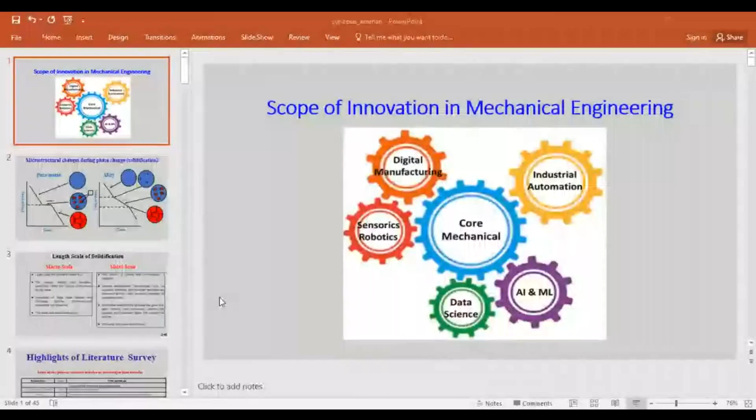If we take the case of Cartesian coordinates, we have kxx, kyy and kzz. For isotropic solids, kxx, kyy and kzz would be equal, but for anisotropic solids, it is not so.

I'll give you an example of gallium. Gallium's solid structure is anisotropic, so it has thermal conductivity of 16 watts per meter Kelvin, 35, and 88 — huge differences there.

We will not go into the physics of why it is so. Keeping the time limit, I'll just tell you the basic reason it happens in some materials: it's because of the planar density. Along the dense planes, the thermal conductivity is comparatively higher, and this is very nicely seen in the case of gallium.

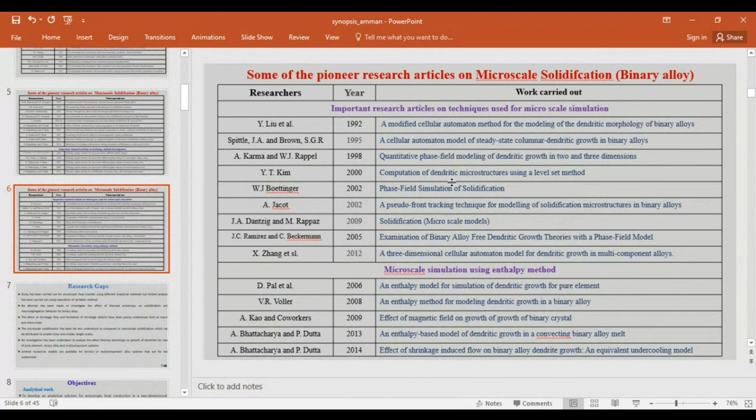Now coming to the case of microscale, some of the important research articles on techniques used in microscale solidification. In the case of microscale, we basically use three methods: the first is cellular automata, the second is phase field, and the other is the enthalpy method.

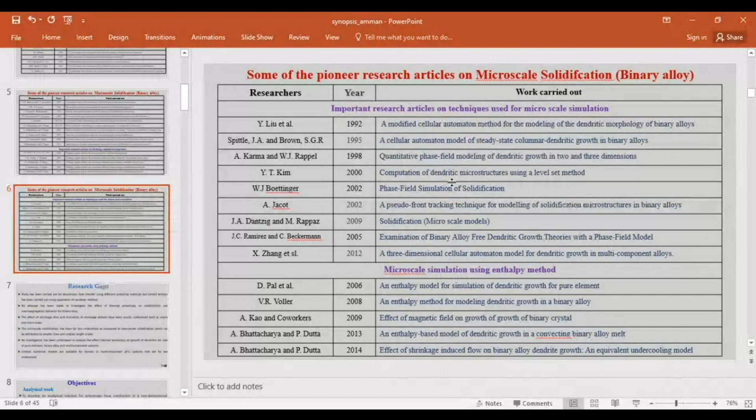In our case, we are using the enthalpy method. Most commonly, phase field and cellular automata are being used. The enthalpy method is a kind of quasi phase-field method, in which we use a single parameter that is calculated in order to compute the phase.

The cellular automata method is more empirical in type — based on all the earlier experiments that have been done, it calculates some of the parameters used in the calculation. Some of the pioneer authors are Kim, Boettinger, Dantzig, and Rappaz. You can refer to the book by Dantzig and Rappaz for the case of microscale solidification models.

Then in India, firstly Dutta sir and his group from IISc Bangalore developed and used the enthalpy method for developing models related to microscale solidification. So based on the above literature survey on anisotropy and microscale solidification that I have discussed...

These are the research gaps that have been identified. Studies have been carried out for anisotropic heat transfer using different analytical methods, but very limited analysis has been carried out using the separation of variables method.

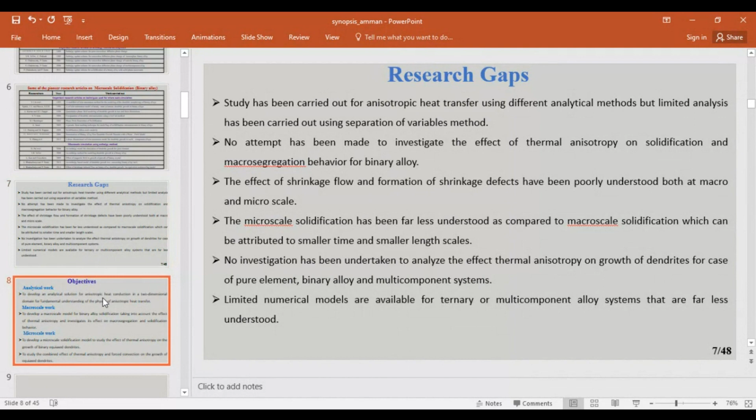This has been categorized into three categories. The first is analytical work. For the case of analytical work, it is to develop an analytical solution for anisotropic heat conduction in a two-dimensional domain, for fundamental understanding of the physics of anisotropic heat transfer. Since a lot of models have been developed, this is basically for validation purposes.

Moving on to macroscale work. The basic motto here is to develop a macroscale model for binary solidification, taking into account the effect of thermal anisotropy and investigating its effect on macrosegregation and solidification behavior. We have analyzed the effect of boundary conditions, thermosolutal convection, and other different parameters that we will discuss later.

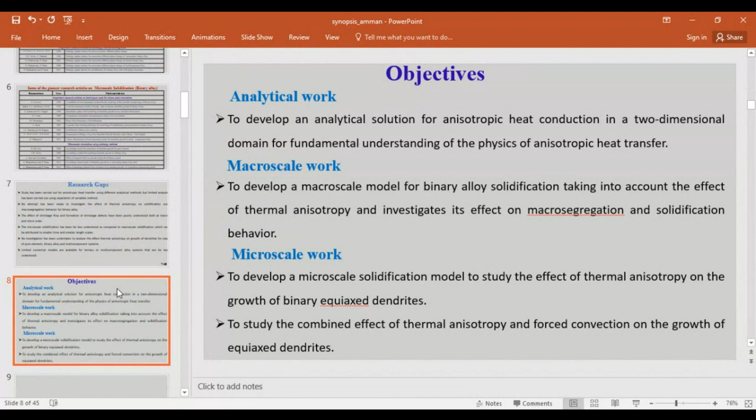Coming to the microscale work, here we have to develop a microscale solidification model to study the effect of thermal anisotropy on the growth of binary equiaxed dendrites. This is a very interesting work, the microscale solidification. This would be followed by a study of the combined effect of thermal anisotropy and forced convection on the growth of equiaxed dendrites.

So coming to the analytical work, here we are using the separation of variables method.

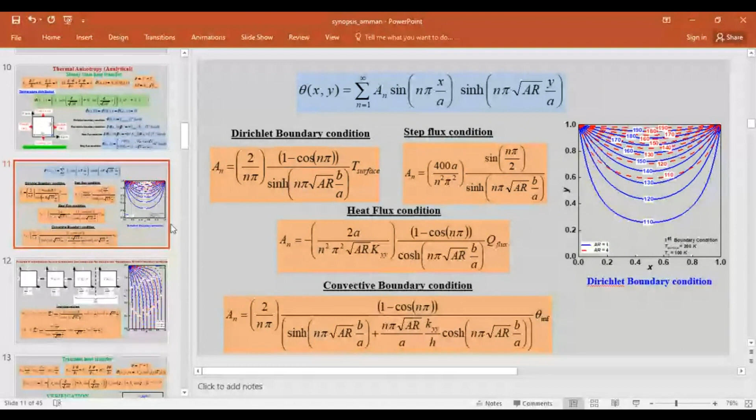When AR is greater than 1, it means - since AR is defined as thermal conductivity along the x direction to that along the y direction - the heat transfer is higher along the x-axis as compared to the y-axis. That's why the temperature gradients that we are seeing along the x-axis, denoted by red lines, are comparatively small. This one is for the steady state heat transfer.

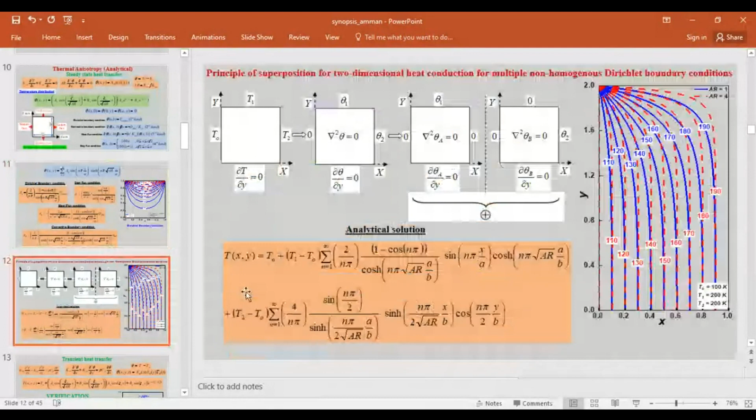Then we are using 2D heat conduction for multiple non-homogeneous Dirichlet boundary conditions. Here you can see this is the initial problem - the left wall is made at a different temperature, top at a different temperature, and bottom at an insulated condition.

Using the principle of superposition, we can divide this problem into individual problems. Here we can put it 0, theta 1, del theta a by del y equal to 0. And here 0, 0, theta 2, del theta b by del y equal to 0. So the analytical solution we get using this is in this form.

If we plot the temperature contours, this is a contour line diagram. Here 190 degrees means this region between 190 and 180 - this temperature is there.

Here what we see is that as there is increase in heat transfer along the x direction, the gradient decreases. You can see here, because if you draw a line, the contour lines are closely spaced here along the x direction. This red one denotes the anisotropy ratio. So moving on, transient heat transfer.

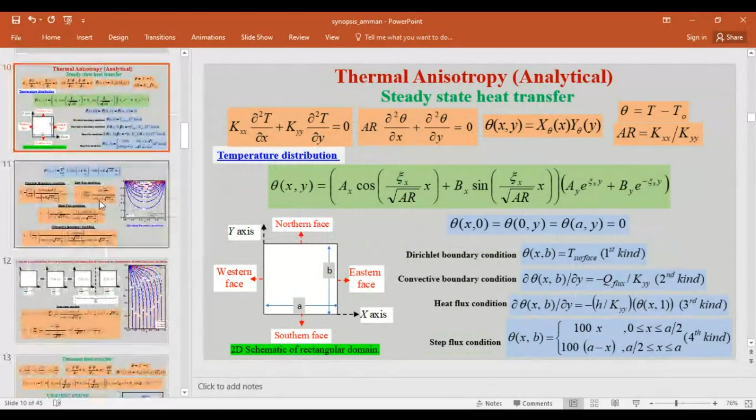So like we had for the steady state condition, since this right hand term is 0. But for the transient term, this would be rho Cp del T by del t. I will not go into the derivation, but we can see the temperature distribution based on this equation - this is the equation that gives the temperature distribution.

So here the problem taken is rho Cp is equal to what? Kxx is 1 and Kyy is 0.1.

Our initial condition - you see, whenever the problem is transient, you need to give an initial condition. Besides boundary condition, initial condition also needs to be given. So based on this initial condition, boundary condition, and thermophysical parameters, the analytical solution we're getting is given by this expression, where ξx is pi into root AR and ξy is pi.

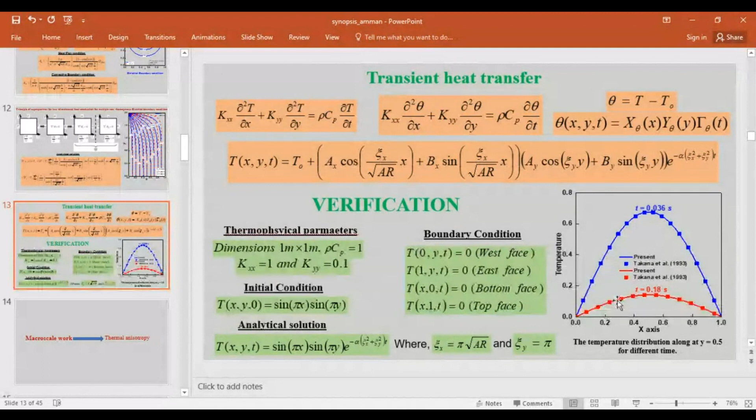This has been validated by the work done by Takana et al, which are in good agreement, for both isotropic case and anisotropic case.

So moving on to the first major work. For my case, I had done work on macroscale and microscale heat transfer. Coming to the macroscale heat transfer, this one is a general diagram that depicts all the different properties and other thermophysical parameters that are affecting the flow governing solidification.

So here the electromagnetic forces are there. Electromagnetic means when you place a magnetic field, it generates a flow.

So it may affect. Then there is dendrite solidification. The formation of dendrites would lead to a formation of porous structure. So the flow of fluid, that is molten metal, in this porous structure is different and depends on the morphology of the porous structure. So that's what you take care of.

Then is solute segregation. Now what happens whenever a material solidifies, like aluminium, copper is in solid aluminium, but when you solidify it, it will reject the copper. So that is solute segregation - the solute is getting segregated. So from the phase diagram you will get this. We will discuss the phase diagram in the next slide.

Then is our morphological instability. Morphological instability means your solid-liquid front is there. So if it is unstable, it may create some problems.

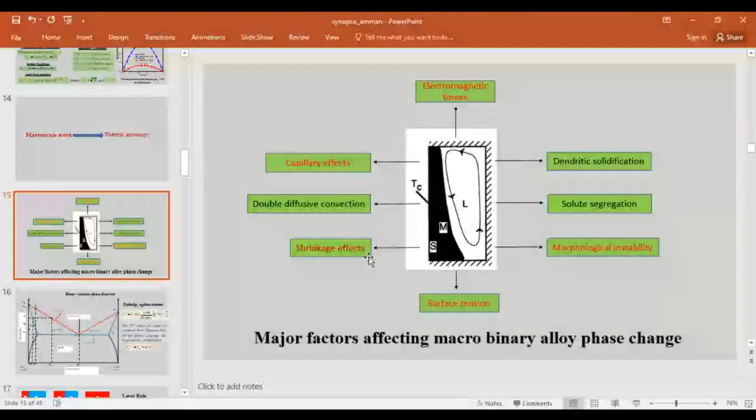I will not talk about this computational part in detail, since most of you won't have gone through this course with CFD, because...

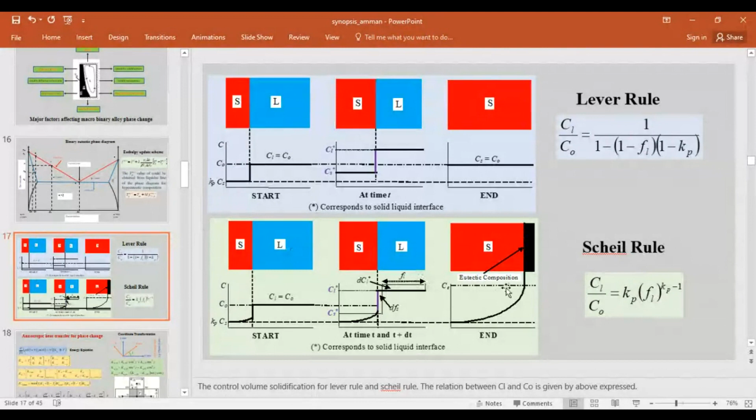And the Scheil rule is there, right? So the Scheil rule, here we assume the diffusion to be zero, right, in the case of the solid, which is actually more true, right? So moving on to next slide.

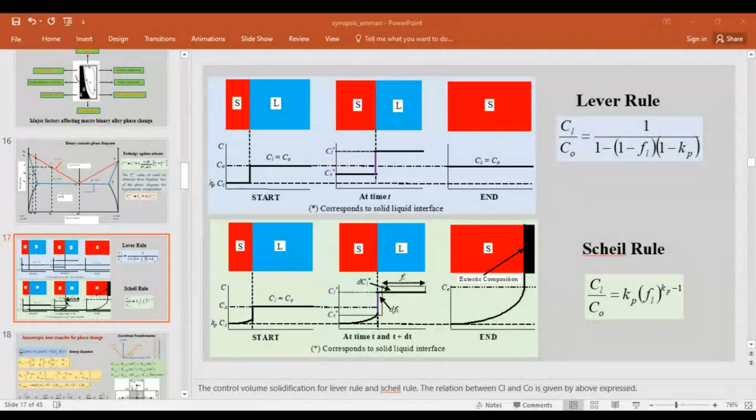Moving on to governing equation. So this is the continuity equation, momentum equation, Y momentum, energy, species, right? And these S are our source terms: Sb is buoyancy, SD is departure, SH is enthalpy source term, SC is species source term, right? And this is our dimensionless parameters that I've used. So non-dimensional parameters are Darcy number, Grashof number, Lewis number, Prandtl number, and Stefan number.

So I will not go into the numerical part because it will unnecessarily lead to confusion. So the finite volume discrete equation is used in this standard form: AP phi p is equal to AP naught phi p naught plus summation of others, right, plus B.

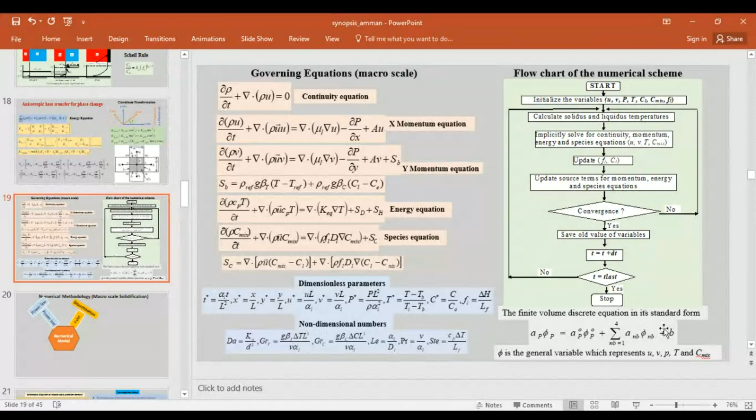Coming to the schematic of the problem, here two cases I have taken, so I will discuss about it. In the first test case, it is insulated: all three walls are insulated, and all four walls are assumed to be impervious, meaning metal can neither get in nor get out, and the left wall is maintained at a fixed temperature. Initially the temperature concentration is maintained. The assumptions taken are that the horizontal and vertical boundaries have zero flow conditions, and all the boundaries are considered to be impermeable, right?

For the second test case, the left wall is maintained at a fixed hot temperature. As mentioned, for the first test case three boundaries are insulated; for the second test case, two opposite boundaries, top and bottom walls, are kept insulated. So the entire cavity is maintained in a liquid state at uniform concentration and temperature, which is a superheated state.

So the density I have taken for the gallium indium binary alloy: rho is 6000, Cp is 400, Lf is 69000 joule per kg. Viscosity is 2.4 × 10 to the minus 3. Thermal conductivity is 30 for the liquid; for the solid it will vary because it is anisotropic. The permeability coefficient is 8 × 10 to the minus 11.

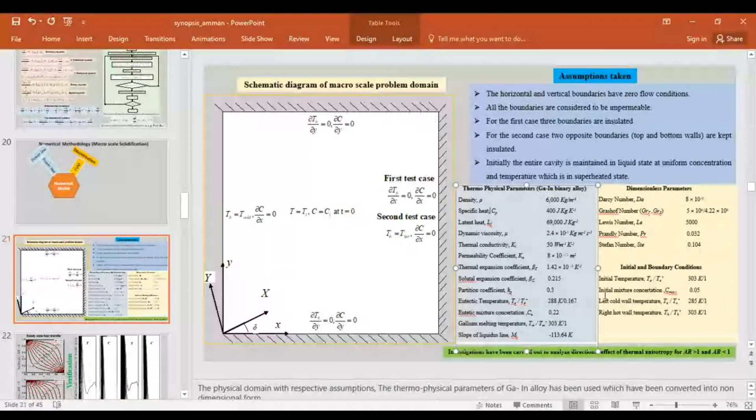Eutectic temperature is 288 Kelvin and gallium melting temperature is 303. And the slope of liquidus line ml is minus 113.64 Kelvin. So based on this physical parameter, these dimensionless parameters are then calculated: Darcy number, Grashof number, Lewis number, Prandtl number, and Stefan number. The initial and boundary conditions: initial temperature 303 Kelvin, initial mixture concentration is 0.05, left wall temperature is 285, and right wall temperature is 303.

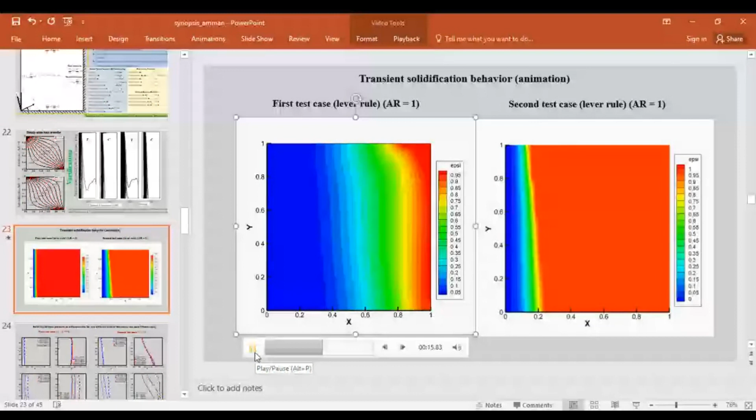But for the second case where AR equal to 4, the solidification is much faster. The solidification takes very less time here because the thermal conductivity is higher along the X direction in the solid phase.

So here, to do a more effective comparison, the solid-liquid front position at different times have been plotted for the first and second test cases. We can see when we change the anisotropy ratio, these are the solidus front positions and these are the liquidus front positions. There is a change when we change the anisotropy ratio. As we increase the anisotropy ratio, AR equal to 1, 2, 4, for both the lever rule and Scheil rule model, we can see the front moves faster.

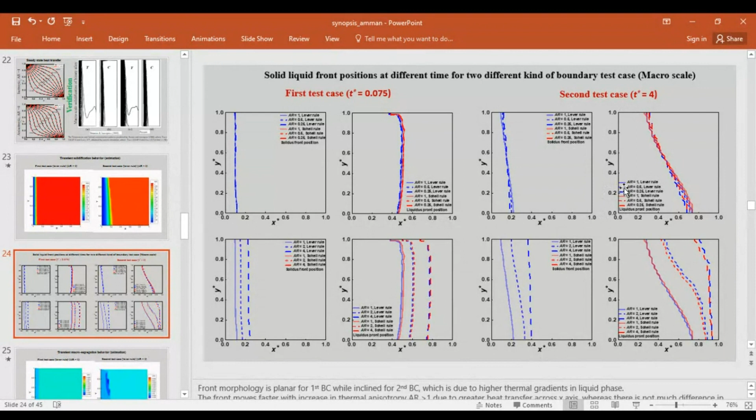Similarly, for the second test case, when we increase the anisotropy ratio, the front moves faster. So that has been seen.

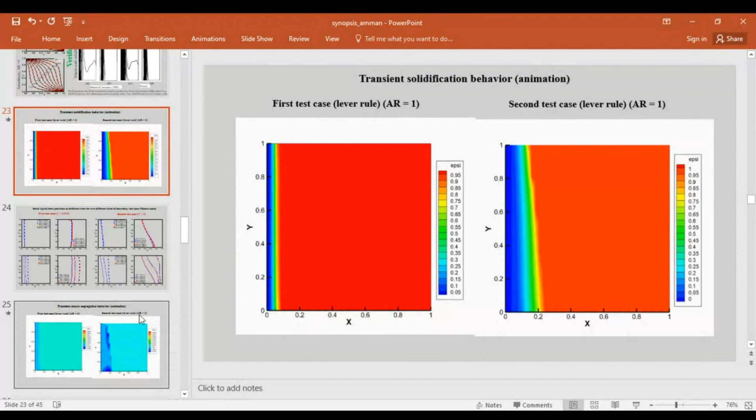Now coming to the second test case, let's see it. The earlier one I showed you was the liquid fraction, but this one is the segregation. Segregation means the solute we are having is getting segregated. Let's see the video.

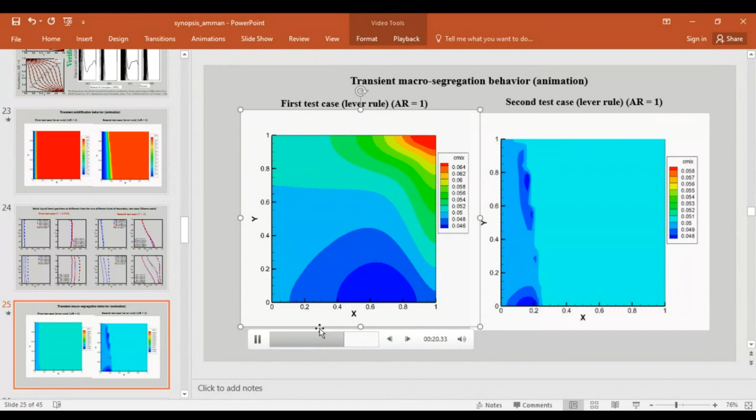So this is for the first test case, and for the second test case, you see here this pattern has been generated.

So now moving on, this is the comparison between the lever rule and Scheil model. Just the gist I'm telling you: with the increase in anisotropy ratio, the degree of segregation is less. So that has been observed.

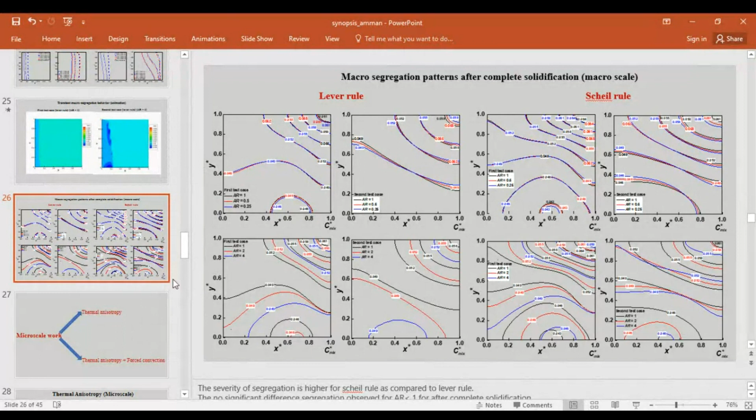So this concludes our macro scale work. Now next, moving on to micro scale work. The micro scale work can be divided into thermal anisotropy, and thermal anisotropy plus forced convection.

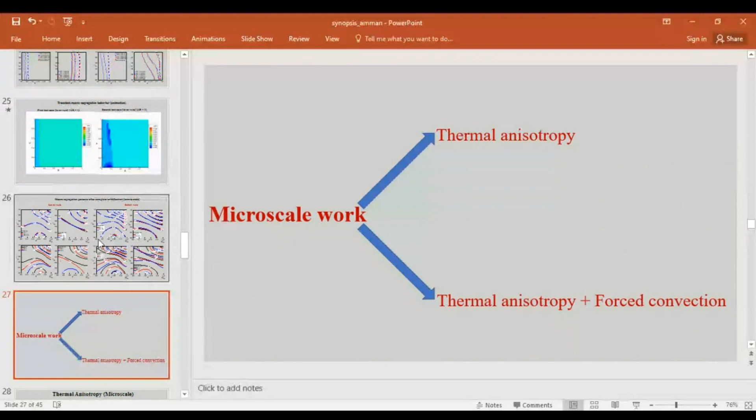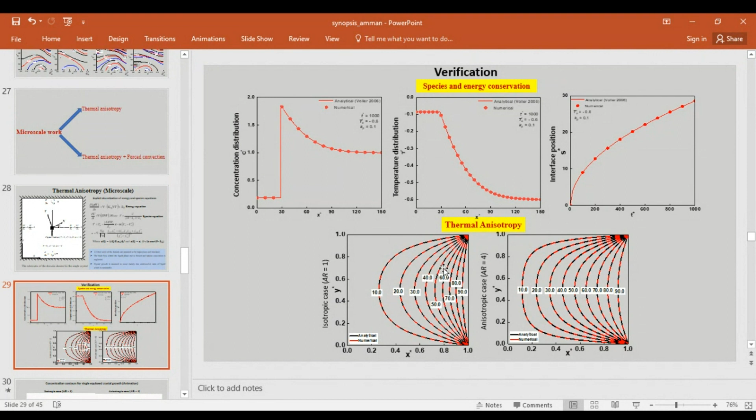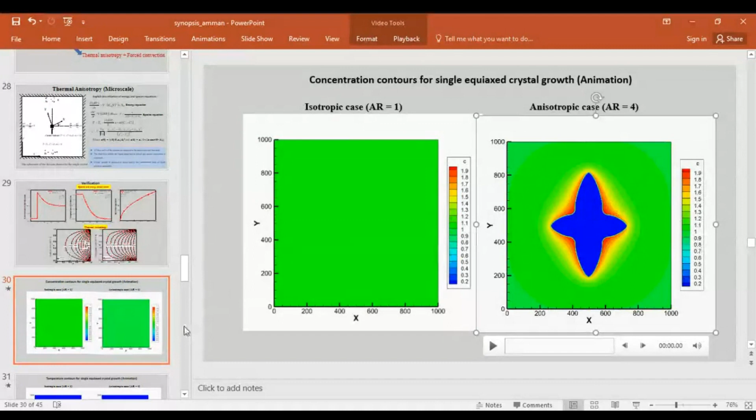So for the single equiaxed crystal growth, here is our concentration distribution. Now, why it happens, we will discuss it. So this we are getting a uniform growth, but for the case of anisotropic, we are getting a non-uniform growth. Now we can see.

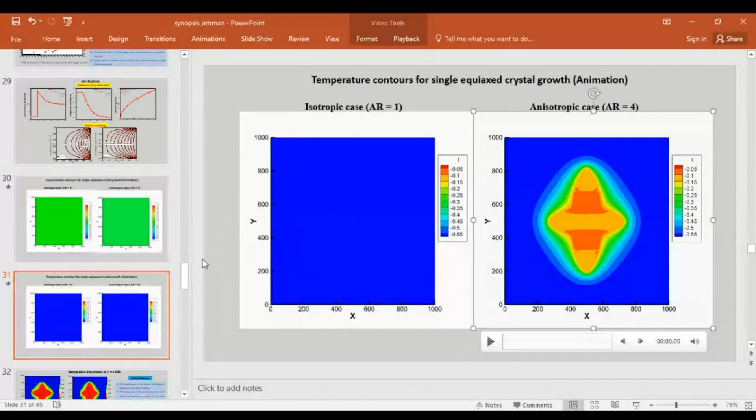You see how the patterns are evolving. There is formation of two localized high temperature zones here and here. Because of this, the gradients are not much along the x direction but higher along the y direction, so the growth is faster along y. That has been shown here: the gradient, because of the formation of two localized zones, the growth is higher along the y direction compared to the x direction. So as we increase the anisotropy...

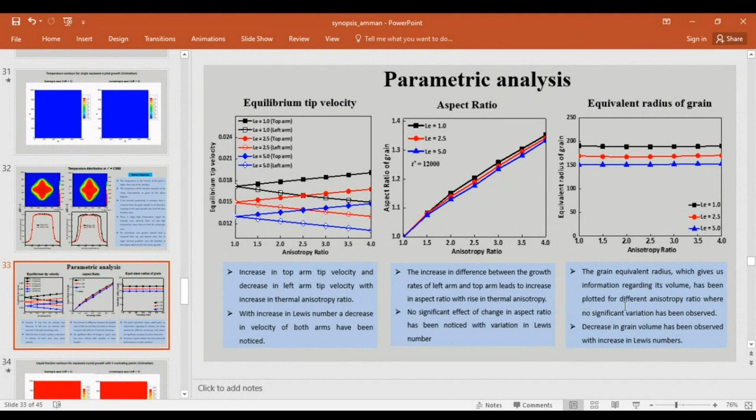An equivalent radius of overall volume of the grain: the grain equivalent radius, which gives the information of current volume, has been plotted for different anisotropy ratios.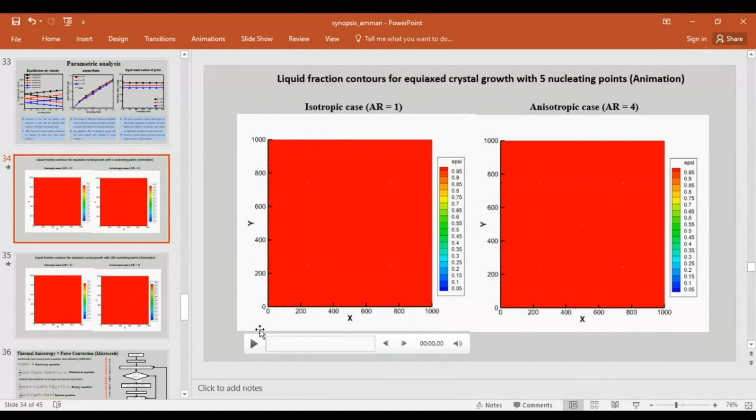Finally, I will show the liquid fraction contours for maybe 100 nucleating points. Let's see it. This is for the anisotropic case.

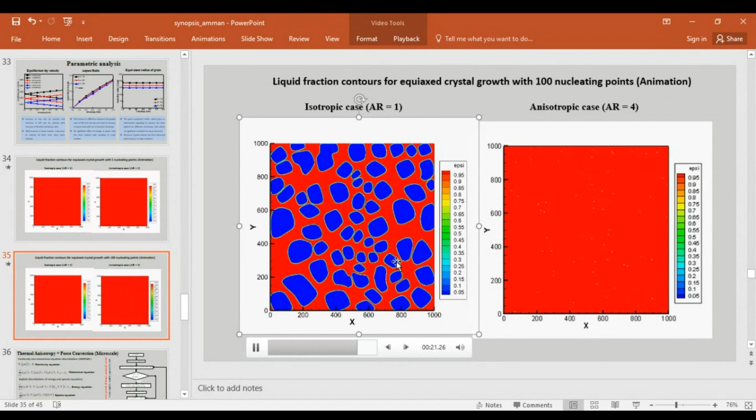Okay, and this one is for the isotropic case. As you can see, the difference is not much. Based on this, we can see that if the nucleating points are fewer, then anisotropy may play a very important role during solidification. But if the number of nucleating points is much more, it may create some problems.

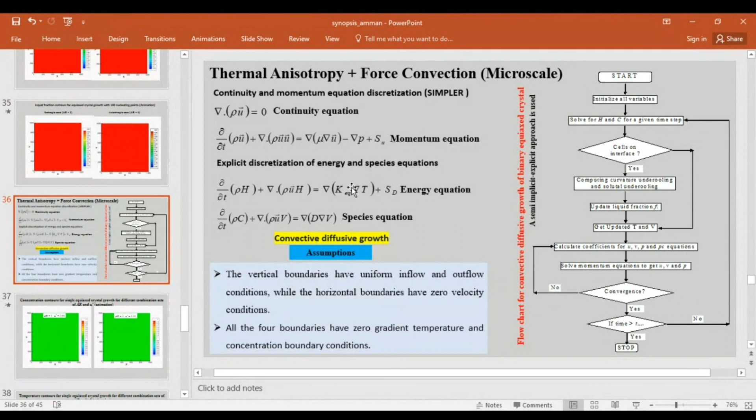So coming to the thermal anisotropy and the forced convection part. Finally, I will come to the concluding part. I will skip this part.

Finally, coming to the conclusions. For the model formulation, a 2D analytical model has been developed using the separation of variables method for anisotropic heat conduction, considering both steady and transient heat transfer.

Then an FVM-based equivalent isotropic heat transfer model is developed for binary alloys at macro scale, considering the diffusion process.

A 2D model for simulating the growth of a dendrite has been developed at micro scale, taking the effect of thermal anisotropy in the heat diffusion process. Finally, the study has been extended to simulate dendrite growth under the combined effect of thermal anisotropy and forced convection.

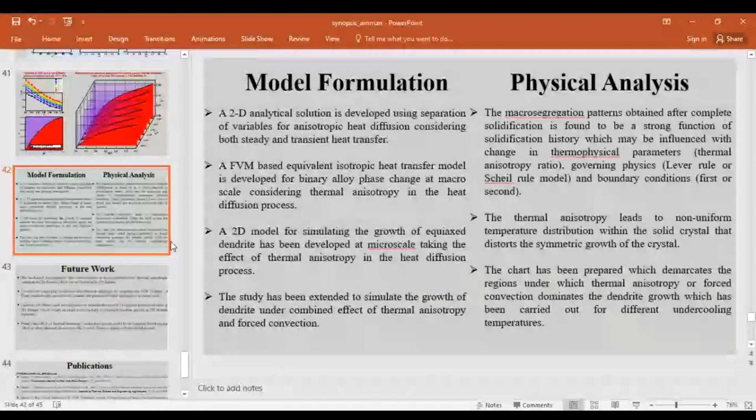Thermal anisotropy leads to a non-uniform distribution within the solid crystal that distorts the symmetric growth of the crystal. A chart has been prepared to demarcate the region where thermal anisotropy or forced convection dominates dendrite growth, carried out for different undercooling temperatures.

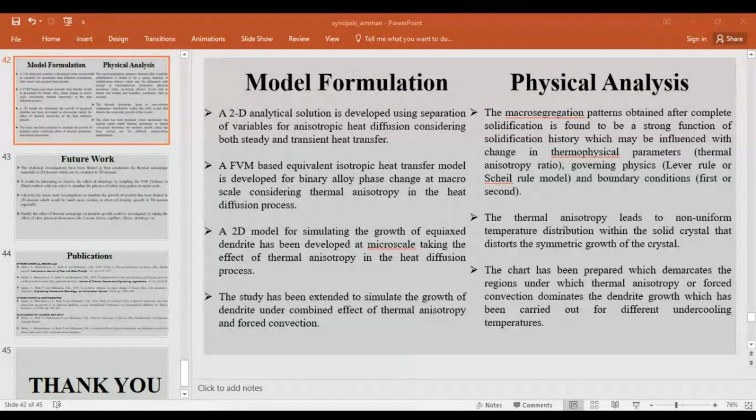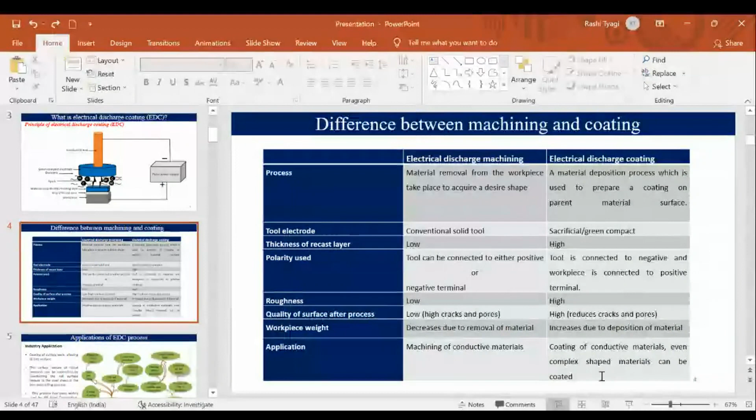Applications: machining of conductive materials and coating of complex shape workpieces can be done by EDC process. Why? Because we can make the green compact tool in any shape. You can use the powder, take any form of die, then compress the powder into the shape you want to obtain. So any complex shape structure you want coated, you can use a replica of that structure in the hot mounting press, or by making dies of that structure. This is one of the main excellent applications of EDC process.

These are some applications of EDC process. As you can see, the process can be used in manufacturing industry or automotive industry. In manufacturing industry, it can be used in coating of tools, dies and molds, orthopedic implants, and skin pass rolling. Coating of cutting tools is done to improve their hardness, so by coating them with hard powder or hard material, we can improve their hardness.

In dies and molds, for corrosion protection, if we want to improve the corrosion resistance of dies and molds, we can do coating of the material that can be helpful in improving the corrosion resistance.

Similarly, in skin pass rolling, basically in the steel industry, rolling rolls are used to compress sheets for the production of sheets. So we provide texture on the roll, such that the texture of the roll can be transferred to the workpiece, to the steel, because we want to hold the oil between the roll and the sheet. So we use texturing on the surface of the roll.

Other applications include coating of complex shape components, as I already told you. Then, to reduce the wear of aluminum - aluminum is the lightweight alloy that is widely used in guide bars and seat support, so we can do coating of the aluminum.

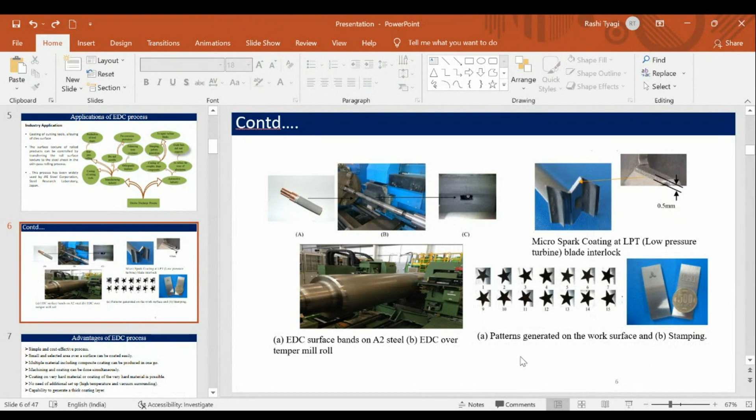So there are two stamps that are made by using the EDC process, in which you can see there are two company stamps that were performed by using electrical discharge coating.

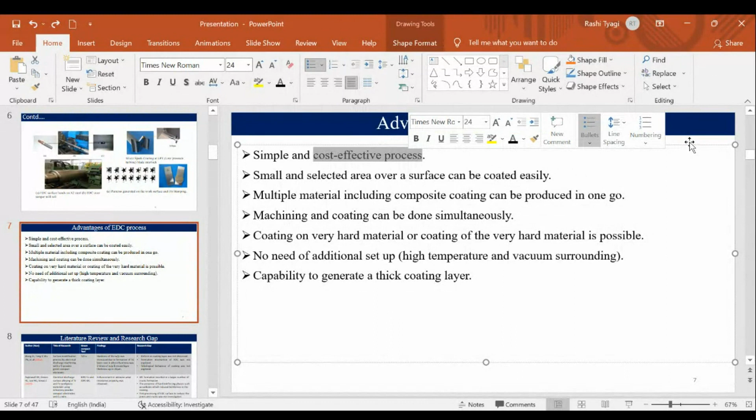So these are some of the advantages of the EDC process. It is a simple and cost effective process. Why am I saying cost effective process? Basically, if you don't know, there are many other processes to perform coating, such as laser cladding, electroplating, physical vapor deposition, chemical vapor deposition. There are many other commercial processes already being used in industry. But when you see, it is difficult to perform all these processes because they have some limitations.

Such as if you are going for the laser cladding process, the laser machine demands very high maintenance, because it is not always working. It always demands very high maintenance and skilled labor, because only a skilled person can use that laser cladding machine, because it needs programming that you can use.

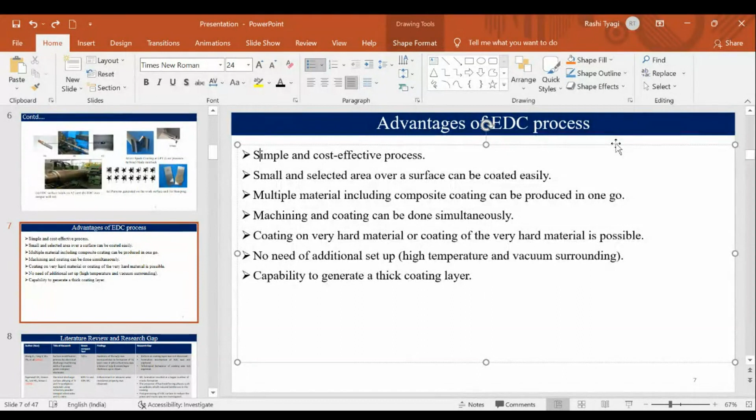Similarly, if we are going for physical vapor deposition, chemical vapor deposition, and electroplating process, these processes can produce only a low thickness. But if we want to repair the component, we can't use these processes because we want to deposit more coating. We want high thickness, so that can only be done by using a process that can provide high thickness.

So it is a very simple and cost effective process. Simple because you can use any shape of electrode and you can deposit it.

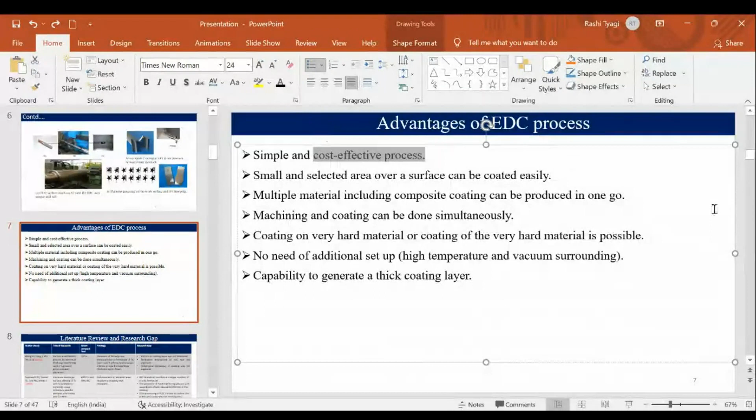Then, a small and selected area over the surface can be coated easily, meaning you can do localized deposition. It means at a particular location you can deposit the coating. So it is written that a small and selected area over the workpiece surface can be coated easily.

Multiple materials, including composite coating, can be produced in one go. It means there are different materials that you can use at one time, you can do composite coating. You can use titanium carbide powder or titanium nitride powder combined, and then produce that coating. So multiple materials can be used, and machining and coating can be done simultaneously.

Sometimes, basically when we are doing machining, the recast layer contains very much cracks, as I already discussed, that in machining the recast layer forms and contains cracks and porosity.

So if we want to improve the properties of the recast layer, we can perform the coating. We can perform the coating and machining together, and so we can obtain good properties in the recast layer.

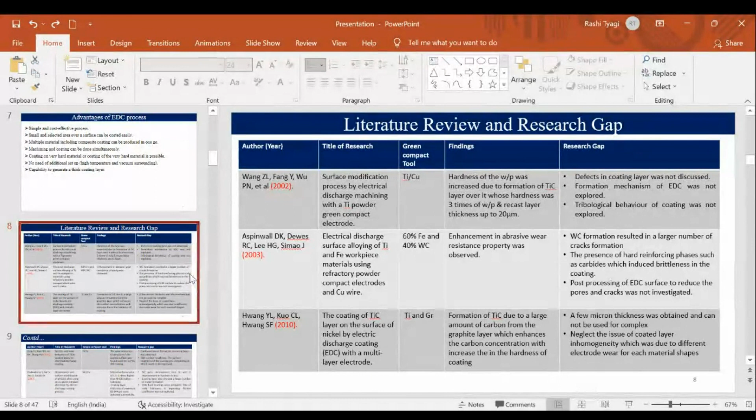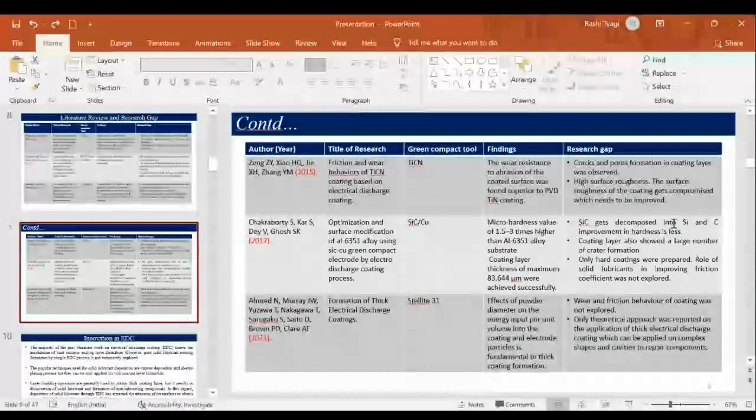Then other research work was done using other green compact tools like titanium carbide nitride, silicon carbide, and stellite 31. Sometimes it is observed that the wear and friction properties of the coating are not discussed, and as I told you, crack formation takes place along with high surface roughness in some coatings.

So you can see from this literature review that most of the work and most of the coatings were done using hard powders. There is no coating provided using soft powder. So mostly coating is provided using hard powders - this is the research gap, the work that has not been done yet.

So what is the innovation in EDC? Because many powders have already been used, what innovation are we going to do? So basically, as I told you, the majority of work showed hard ceramic powder. Pure solid lubricant coating formation by the simple EDC process has not been extensively explored.

So what is a solid lubricant? We will discuss that later in a further slide. Basically, pure solid lubricant coating, as we have seen, cannot be easily deposited.

In brief, I can tell you solid lubricants can provide excellent tribological properties. If you want to obtain excellent tribological properties, you can use solid lubricant powders. It's far better than hard powders if we can utilize their full properties, because solid lubricant sometimes disintegrates into other compounds, making it difficult to utilize solid lubricant coating. So we will see how we can obtain complete deposition of the solid lubricant without disintegration.

Using a simple EDC process, different techniques are used but can only be used for thin coating layer formation. EDC can be used for thick coating layer formation, up to 2mm thickness, which has already been achieved. Laser cladding operation is performed to obtain thick coating layers, and it's also performed using solid lubricant powders, but it is observed that there is a formation of non-lubricating compounds.

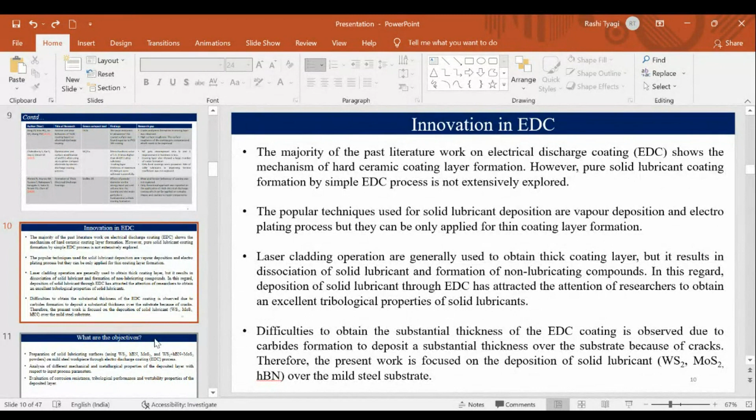So these are some of the objectives that we have prepared. The first is preparation of solid lubricant surfaces on the mild steel workpiece through the electro discharge coating process. Second is analysis of different mechanical and metallurgical properties of the deposited layer with respect to input parameters.

We are changing the process parameters, as I have told you: peak current, duty factor, voltage - the parameters that can be changed in the EDM machine, as we are giving voltage and current. Current is given to melt the material, and voltage is given to disintegrate the dielectric. So by changing different input parameters, we can obtain different mechanical and metallurgical properties.

Then we have done the evaluation of corrosion resistance, tribological performance, and wettability analysis of the deposited layer.

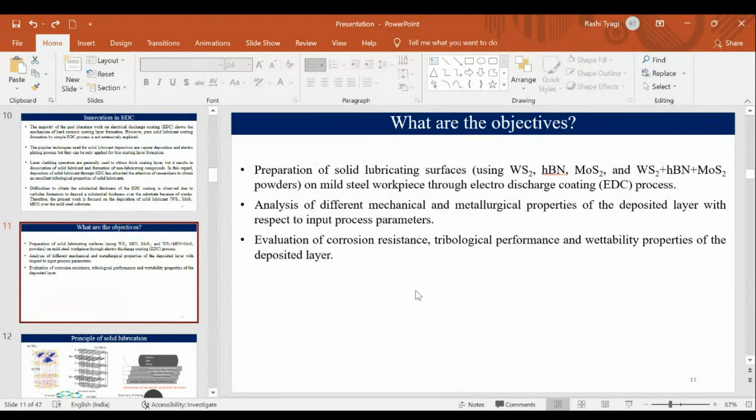So basically, before going to the EDC process or methodology used in the EDC process, we want to discuss the principle of solid lubrication. In this figure you can see different solid lubricants: WS2, MoS2, HBN, in which it can be seen that they all have a layered structure. See, in the figure you can see they have the layered structure.

Layered structure means there is a laminar crystal structure, which means there is layer-by-layer formation. It means they are composed of laminae. They can align themselves in the direction of motion - direction of motion means if they are going against the other surface, they will align themselves in the sliding direction. This gives excellent tribological properties to the surface, meaning low coefficient of friction. Why? Because they align themselves in the direction of motion.

How? Because when we are using solid lubricants at low shear stress, they provide low shear stress between their layers. So when we use them for the soft component or the hard component, you can see the soft component aligns itself in the direction of sliding. Sliding direction means if they are moving towards the other surface. In a tribological test, you use two surfaces: first is the counter disc, and second is the pin or coating that you are using.

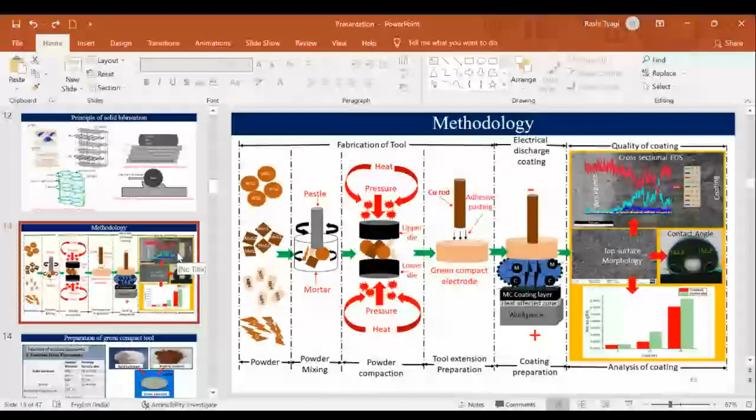Moving to the further work, this is the process by which we have prepared the green compact electrode. These are the two powders that are mixed to make the green compact. That green compact is attached to the copper rod, because copper is a conductive rod, so it becomes easy to utilize the copper rod.

These are some of the parameters that we have used: the powder particle size and average particle size of solid lubricant WS2, MoS2, and HBN powder that we utilized, the temperature that we provided, the pressure we used, and the heating time and cooling time to make the green compact tool.

This is a variable process parameter, the mixing ratio, which we are varying because we are using the powder in different ratios, such as 40% copper with 60% WS2, or 50% copper with 50% MoS2, or copper with 40% HBN.

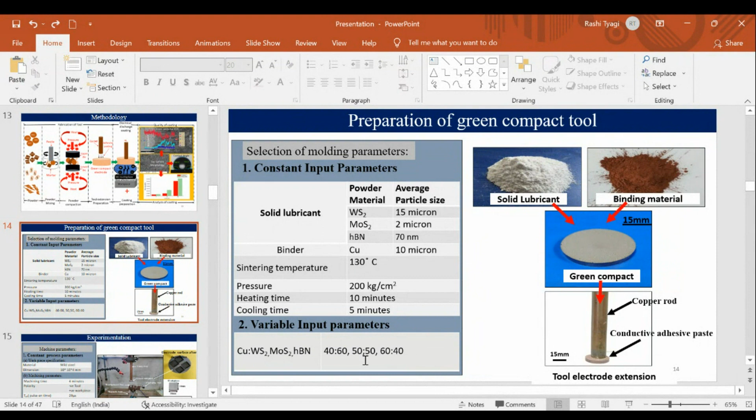So these are the three mixing ratios that we are utilizing for a particular combination to form the experiment, which I will also show you in the experimental table.

So this is the experimentation work that is performed. There are the machining parameters and workpiece specification where we utilize mild steel, with machining parameters of 29 micro pulse on-time and gap voltage of 40 volts, and variable input process parameters like peak current and duty factor, as I showed you earlier in the EDM process machine parameters that we can change.

This is the apparatus, the setup of the EDC process systematic diagram that we are showing. This is the original setup that we have used in performing the EDC experiment, in which this is the green compact tool.

This tool is very small, so we cannot directly put it inside this hole. So we have utilized the rod to paste it onto the surface of the green compact tool, because we just want to deposit some material from this surface.

Material will not be deposited from the conductive rod, only from this tool. We pasted the rod to fix it inside this setup. This is a clamping vise on the magnetic base, used to hold the workpiece surface. The clamping vise is kept on the magnetic base so that material gets deposited from the green compact tool onto the workpiece surface during melting, when current goes through the electrode.

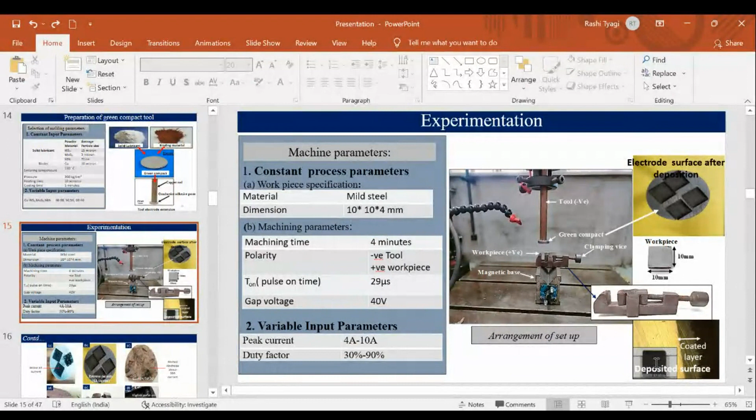This is the electrode surface after deposition. The hollow structure shows that metal will be deposited on the workpiece surface. The coating layer we have obtained is the original deposited surface, which shows that metal will be deposited on the workpiece surface.

This is the process by which we selected the process parameters. Below 4 ampere current, there is no deposition. When increasing current, deposition takes place. Also, the electrode melts above 10 ampere current. At high coating time, there is a hollow structure obtained, meaning current goes through the green compact tool and connects with the tool surface, which we don't want to deposit. So we fixed the coating time.

There is low compaction pressure and temperature. If we use very low compaction pressure, the tool will break. So we have to decide a particular temperature and pressure to use in this process. This is the higher pulse on time and higher voltage time, so we fixed the constant pulse on voltage time to deposit the coating.

There's the experimental table on which we performed these experiments using solid lubricant. There's the fabricated coated sample that we obtained after performing the EDC experiment.

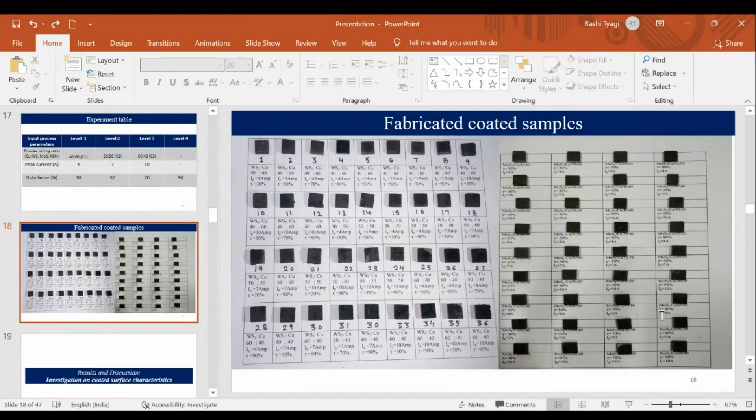We'll discuss the investigation on coated surface characteristics, understanding how the coated surface characteristics change. This is the cross-section morphology of the coating at different peak current. It is observed that as peak current increases, figure A to C shows the cross-section morphology for MoS2 plus copper coating. Similarly, figure D to F shows WS2 plus copper coating, and G to I shows HBN plus copper coating. As peak current increases from 4 ampere to 7 ampere to 10 ampere, higher coating thickness is obtained.

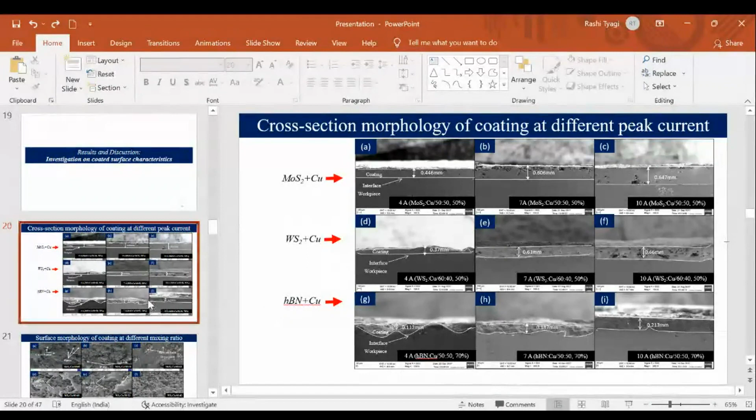This is the surface morphology of coating at different mixing ratios. Figure A to C shows the MoS2 to copper ratio, which changes from 40:60 to 60:40. This means when MoS2 is 40% and copper is 60%, versus MoS2 60% and copper 40%. Similarly, this is a 50:50 MoS2 and copper ratio.

We observed the effect of mixing ratio by changing the ratio of the powder, such as when MoS2 is high and copper is low, or copper is high and MoS2 is low. In analyzing the surface morphology, we observed non-uniform deposition over the workpiece surface. This non-uniform deposition occurs when MoS2 percentage is high, because MoS2 is not completely conductive—it is a semi-conductive material. So when increasing the percentage beyond a certain level, it becomes difficult for the current to go through the electrode and deposit in the whole amount, causing non-uniform deposition.

For WS2 copper coating, increasing WS2 percentage helps reduce pores. There is a high number of pores at low amounts of WS2 in the coating, but very low pores at WS2 60:40 coating, because WS2 percentage is higher. Similarly, for HBN copper coating, it is observed that when HBN percentage increases to 50:50, there is a very low amount of gaps and defects in the coating. This image shows the process when using 100% copper, meaning a complete copper tool.

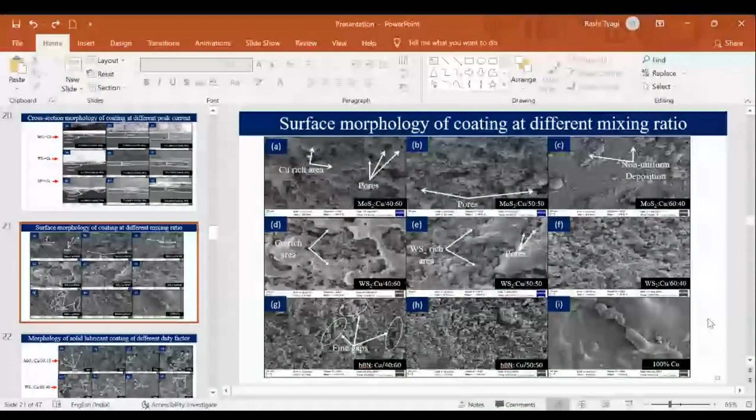Basically, the process efficiency can be determined by duty factor. Why? Because when you use a duty factor higher than a particular level, arcing will take place.

What is arcing? Arcing means the spark will not move to different locations; it will not move from one location to another. Localized deposition and burning take place, so coating will not be done properly.

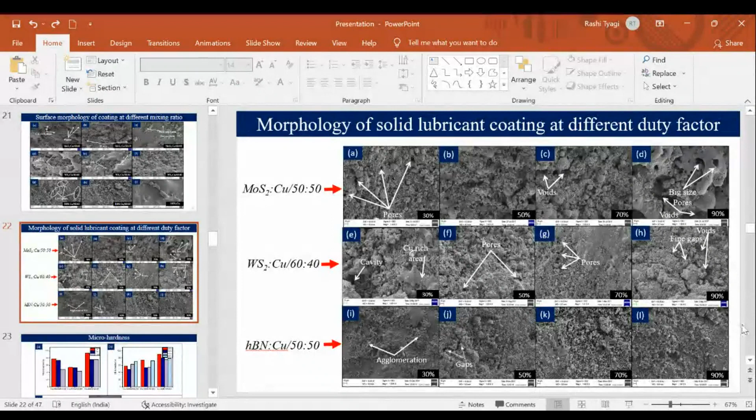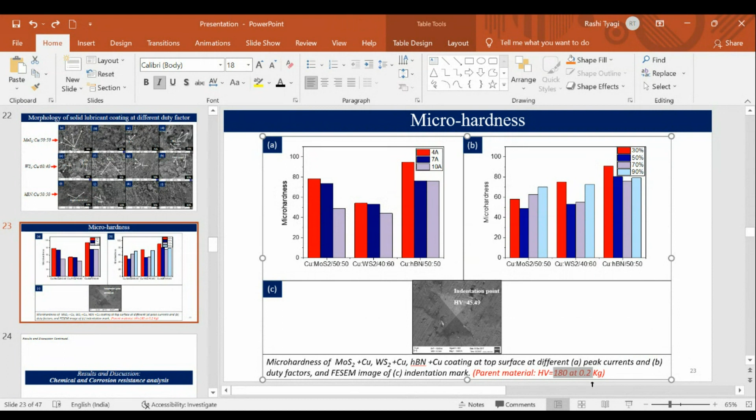Parent material hardness was 180 at 0.2 kg. Although all these coatings showed low hardness—you can see these hardness values are very low, like 60, 80, 20, 40—compared to the parent material. Why? Because we are using the solid lubricant.

So now for the chemical and corrosion resistance analysis in this work. Chemical analysis means we have performed EPMA analysis. EPMA basically stands for electron probe micro analyzer analysis.

It means electron probe is used similar to EDS process, but it gives you an EDS spectral distribution of the coating. It gives colorful images or spectral distribution of the elements, so you can see how the elements are depositing in different ways, whether uniformly or not. So EPMA is performed to check the uniformity of the coating.

So the chemical state analysis was checked using XPS analysis. XPS is performed to check the chemical state or bonding state of the solid lubricant. Initially, I told you that the solid lubricant gets dissociated into different compounds, so you cannot get the complete tribological properties just by solid lubricant.

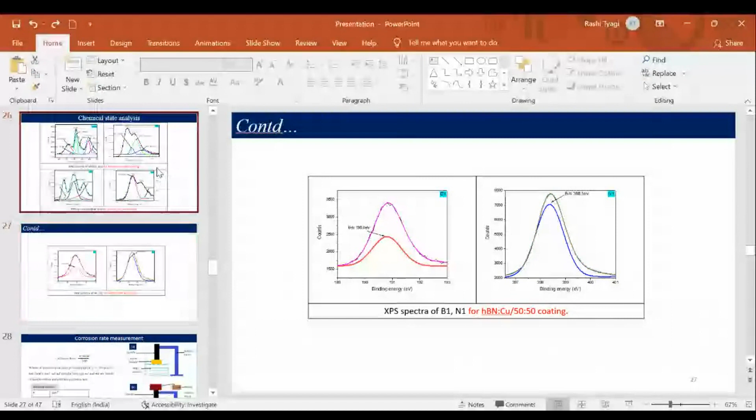Also, from the literature, we found that the boron nitride peak is obtained at 190.8, so we can say that boron nitride is completely deposited and cannot be dissociated from the lubricating compound. Similarly, molybdenum is not dissociated but remains from the MoS2 compound.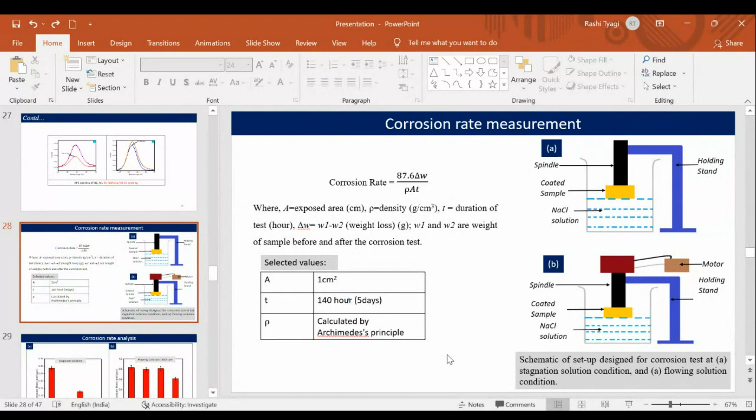We have done the corrosion analysis at stagnant solution condition and flowing water condition, where water is flowing by using a motor. Stagnant water is used to check if corrosion is affected by the motion of the water.

The wettability analysis of the coating surface. Basically, wettability is the ability of the liquid to wet the surface, generally defined by superhydrophobicity or hydrophilicity. Superhydrophobicity means the surface will repel the water, and hydrophilicity means it will attract the water.

If this angle is larger, it means the surface will repel the water, meaning it will be superhydrophobic. If smaller, it will be superhydrophilic.

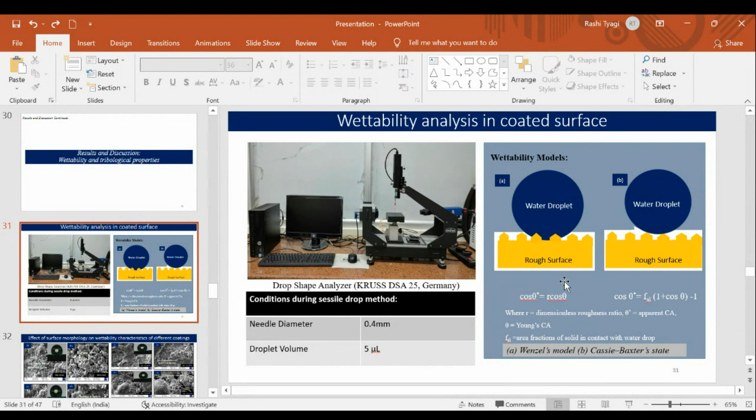This is the needle we used, 0.4 mm diameter, to deposit the water, with a droplet volume of 5 microliters. These are the Wenzel model and Cassie-Baxter model that we used, which show that if the roughness increases, then the water contact angle increases.

Why are we increasing the contact angle? Basically, contact angle increases to obtain the superhydrophobic coating. Superhydrophobic coating is basically utilized in self-cleaning industrial applications because it will repel water, so we can use it for self-cleaning applications.

We also obtain the superhydrophobic coating with good corrosion resistance that can be utilized in different surgical components or wherever else the superhydrophobic coating is demanded.

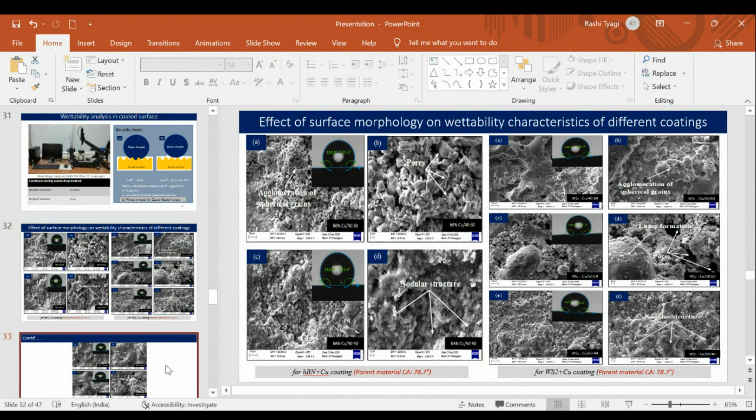Because at maximum lumps, it means there are different protrusions, different peak and valley heights, so the surface roughness will be increased, and surface roughness is proportional to contact angle according to the Wenzel model. So if the surface roughness increases, then the contact angle increases, and you can obtain a high contact angle.

So this is the surface roughness that we have measured for different coatings. You can see as the surface roughness increases in this graph, you can see RA, this is the RA surface roughness, for different mixing ratios of the MOS2 and copper powder that we have used.

This is the contact angle that we have measured, which I have already shown you. These different coatings: this is for copper plus MOS2 coating, this is for copper plus WS2 coating, C is for copper plus HBN, and D is for different mixture coatings.

We have observed high surface roughness at 8 micrometers, and we obtained a maximum 165 degree contact angle for copper plus MOS2 coating. So at maximum surface roughness, maximum contact angle is observed according to the Wenzel model.

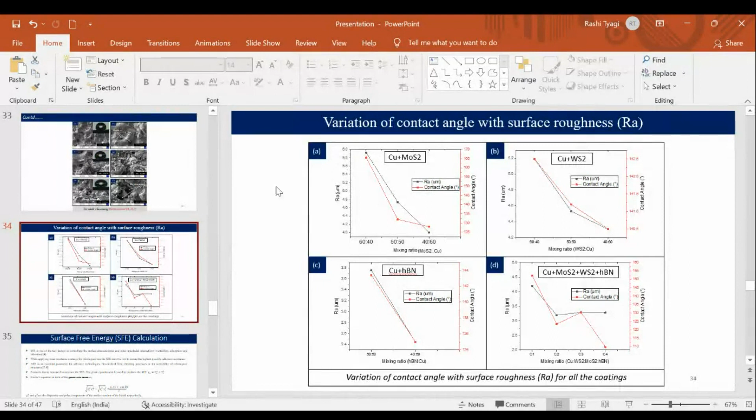So we can say that by increasing the surface roughness, we can obtain the super hydrophobic coating.

So basically wettability means when the droplets make contact with the solid surface, it also depends on the surface free energy. Surface free energy means the extra energy that a surface has due to intermolecular attraction between particles, because when water comes in contact with the solid surface, there is always an intermolecular attraction between the water particles and the surface.

So if the surface energy of the solid surface is higher, it will attract the water, and the surface becomes hydrophilic. But we want a super hydrophobic surface, meaning it has to repel the water. How can it repel the water? When it has low surface energy.

So we can say that wettability also depends on the surface free energy. By reducing the surface free energy, we can obtain low adhesion, meaning the surface can provide the highest possible adhesion resistance. As we observed, while applying the wear resistant coating in tribological use, the maximum highest adhesion resistance is utilized. So by reducing the surface energy, using low surface energy, we can provide the highest possible maximum adhesion resistance.

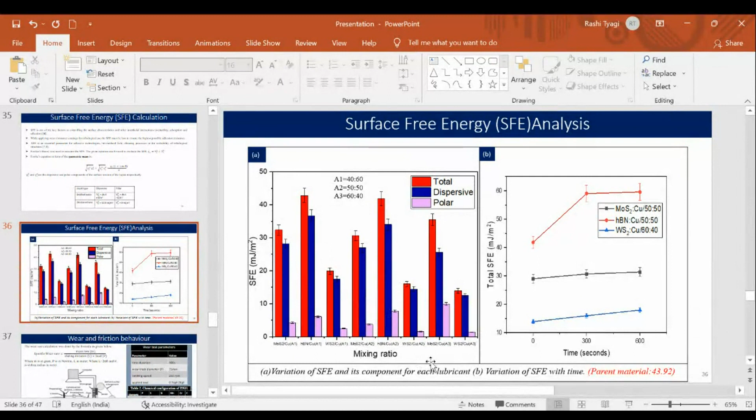Then we have done the wear and friction behavior analysis, the wear rate calculation, and specific wear rate calculation by measuring the mass loss before and after the wear test, the sliding distance, the surface on which the pin slides, and the load we have applied.

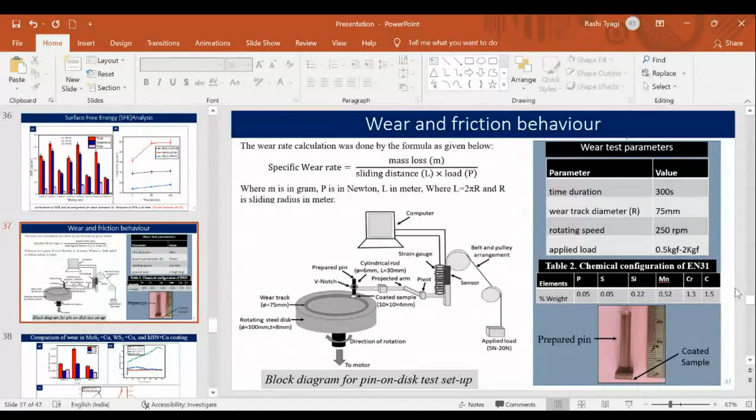Then you can see how much wear there is in this process. So this is the pin that we have prepared.

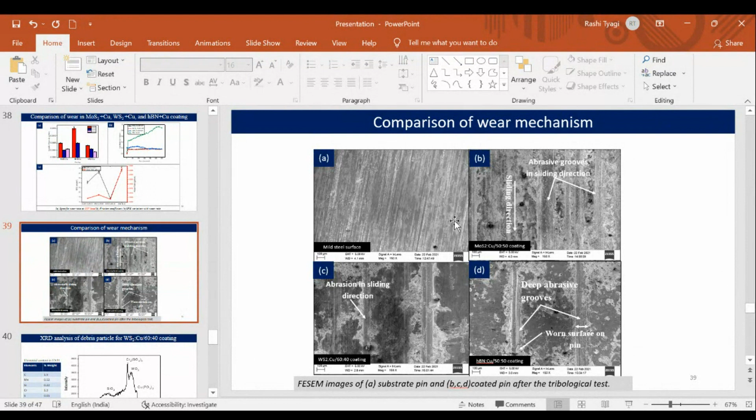There are pin images that we have captured after the coating, showing the wear tracks that we can see when wear takes place. Minimum wear is seen for the WS2 plus copper coating, with minimum abrasion in the sliding direction. Although deep grooves are observed for the HBN plus copper coating and MoS2 plus copper coating.

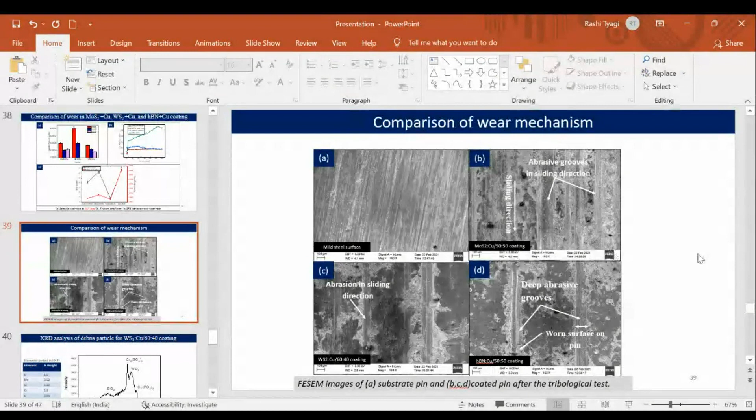So these are the summary of the results. MDR is maximum, this is 0.895 that I have not shown, but maximum tool wear rate and material deposition rate, the MDR, is obtained for WS2 copper coating, which also shows the high thickness. Surface energy is lowest for the WS2 copper coating.

The hardness is lowest for WS2 plus copper coating, with lower surface roughness. But the contact angle is higher for MoS2 plus copper coating, as it has the highest surface roughness, because higher surface roughness is responsible for high contact angle.

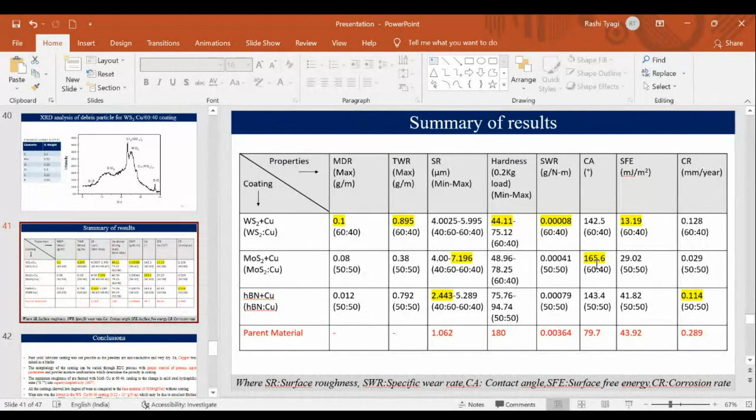So the conclusion we can get is that pure solid lubricant coating was not possible. So we used copper powder, because copper powder was conductive and works as a binder, since all the other powders are semiconductors. We can only perform the EDM operation at high conductivity, so we used copper powder as a binder to mix with the solid lubricant.

By controlling the input process parameters, we can reduce the porosity in the coating. Also, super hydrophobic coating is obtained, which changes the hydrophilic state of the mild steel parent material into super hydrophobic.

All these coatings show a low degree of wear compared to the parent material, and wear rate was lowest for WS2 copper coating. Why? There may be some relation between surface free energy and WS2 plus copper coating, because surface free energy is lower for this coating, so it showed lower wear.

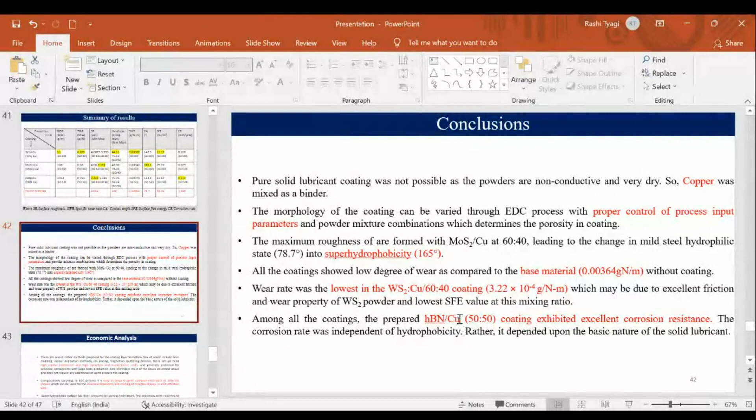Also, corrosion resistance is higher for HBN plus copper coating, as HBN is the corrosion resistant material, so it will provide you high corrosion resistance.